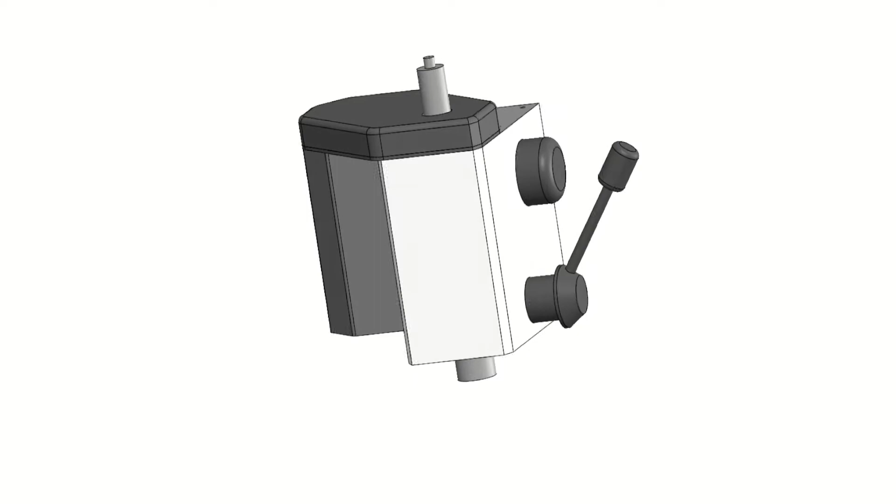Hi there! Luckily, a few days ago I managed to find some time to complete the stage of redesigning my little machine. And in this episode I will show you how I rebuilt the spindle drive, how I chose the components of the new V-belt transmission system, and why I even took care of it.

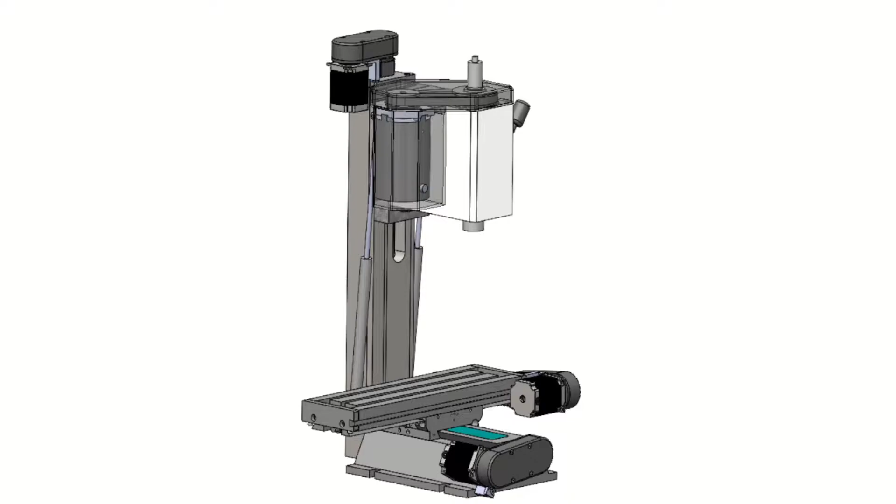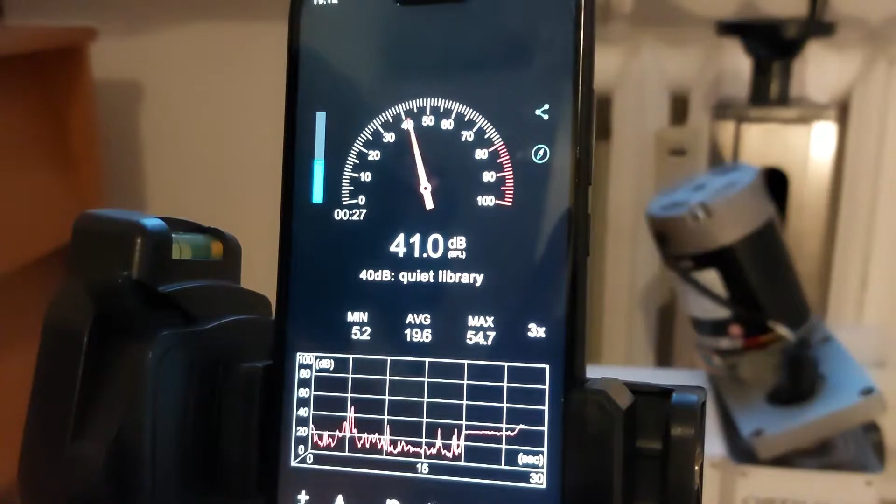The best answer to this question is size. One of my basic assumptions was that the milling machine together with the housing should take up as little space as possible, so that I could transport it without disassembly. As you can see, the maximum height of the milling machine after reworking the Z-axis is 809 mm. Thanks to the rotation of the motor and use of a belt transmission, its height drops to 700 mm, almost 11 cm less. Another reason is the noise generated by the original gears.

The belt transmission is one of the quietest, so there will for sure be a big drop in the noise level. Firstly, I did research and found out some information about the different types of belts. To be honest, I did not choose the best one, but rather an inexpensive and easily available one, so that in the event of a failure, I could quickly buy a broken belt or pulley.

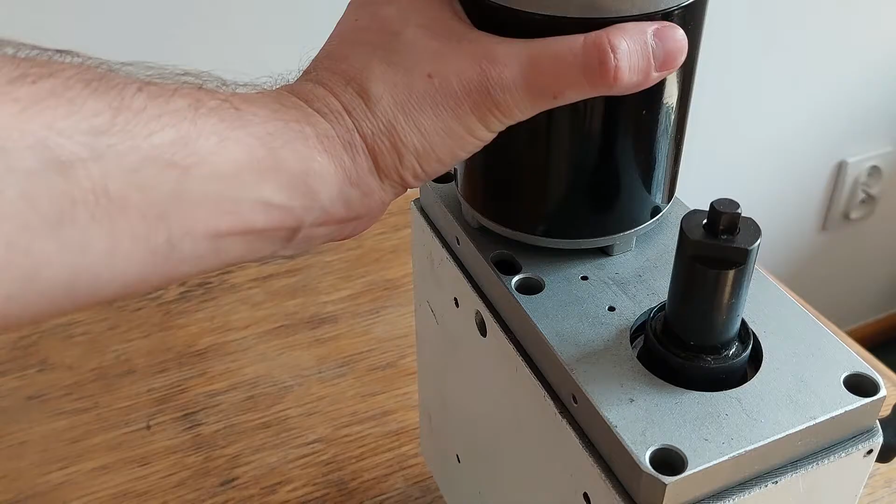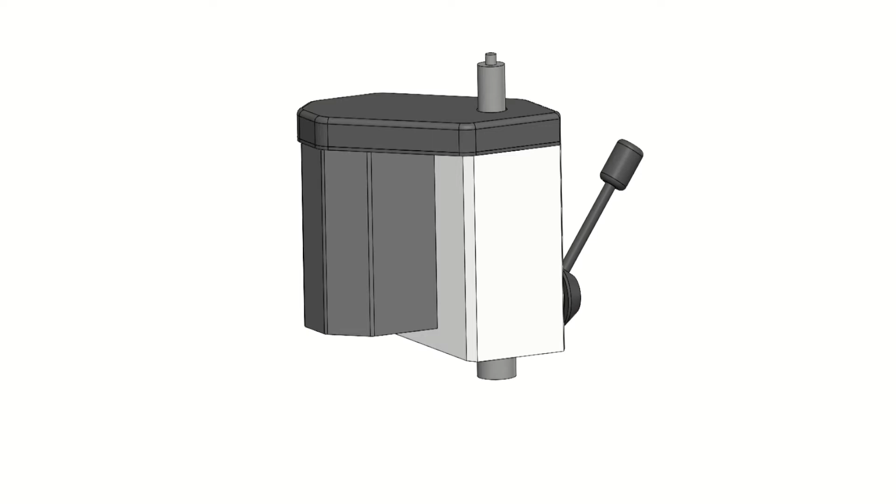The manufacturer has placed the motor on the top of the spindle housing, which meshes with the spindle two-stage gear that is placed inside the housing. After removing the visible gears, I will be able to rotate the motor by 180 degrees from the original setting and use the V-belt transmission system. I decided to go for an SPA type belt because it was easy to get small size wheels and short belts, so the whole design would be really compact.

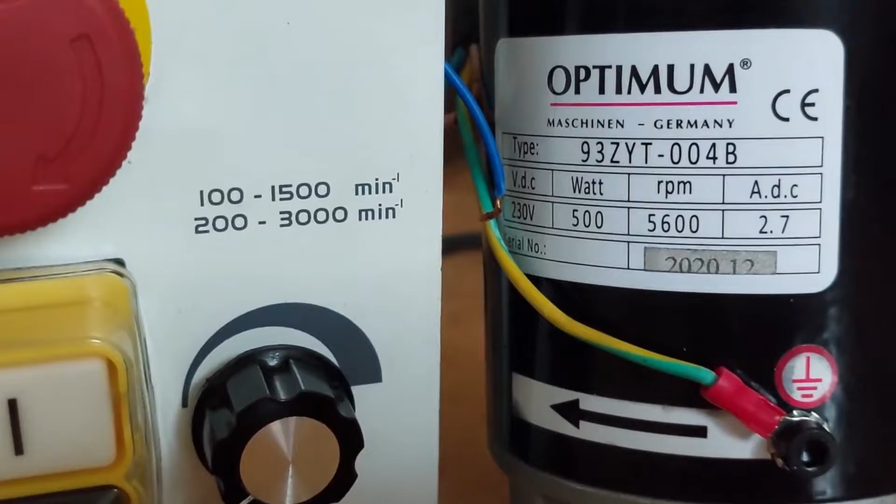Knowing that the maximum motor speed is 5600 rpm and the maximum spindle speed before the redesign is 3000 rpm, I have to choose a gear ratio not so far from the original one to not overheat and destroy the spindle bearings. I chose pulleys with diameters of 50 and 71 mm, so the maximum speed of the spindle will be about 4000 rpm. Of course, this speed will not be used very often, so hopefully the life of the spindle bearings will not be very shortened. We'll see.